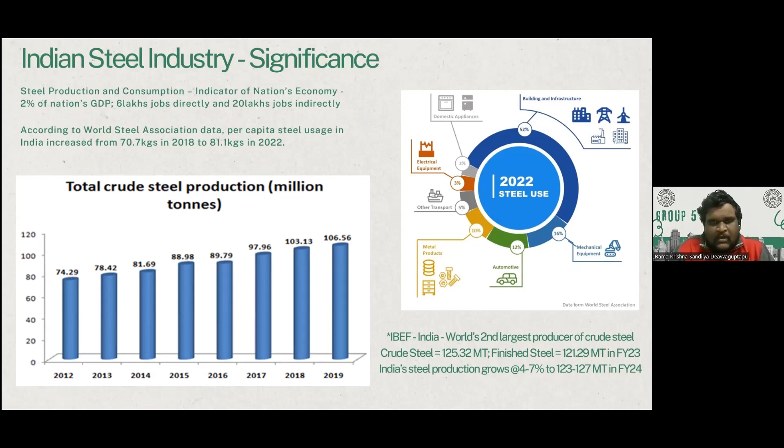For this, the Government of India announced the steel scrap recycling policy, which aims to reduce imports and process recycled steel in an organized and environmentally friendly manner. Over the course of the next 10 minutes, we'll be going through the ESG practices that companies across the world are practicing.

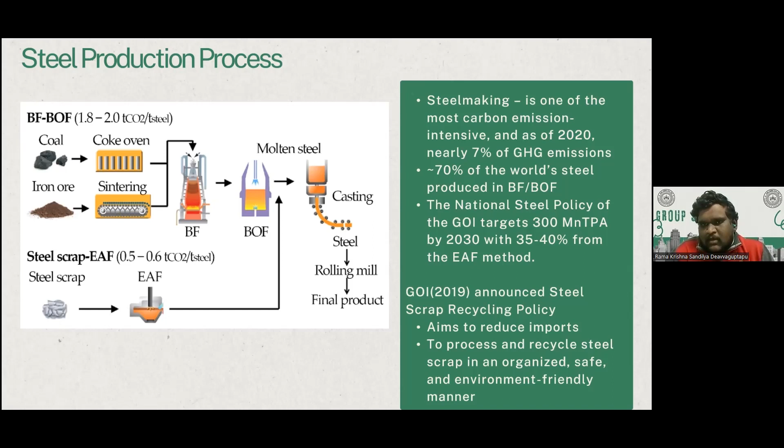The first one to begin with, in the carbon neutrality part, is green hydrogen, which will be formed through the electrolysis of water. By injecting this, there will be almost carbon neutrality in steel. Though there are some limitations at present for this process, over a period of time the rates of hydrogen will be decreasing, which can be seen through the graph.

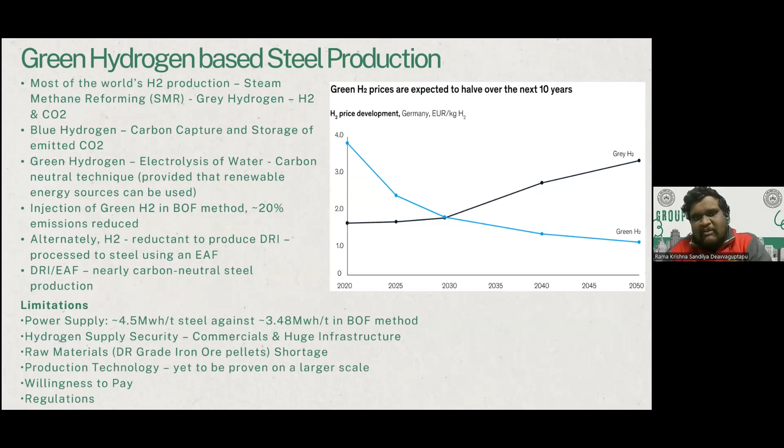Let's move on to the circular economy, a revolutionary concept where we share, lease, reuse, repair, refurbish, and recycle materials and products, minimizing waste and maximizing sustainability. Let's focus on steel, a material that plays a crucial role in our daily life. Despite having low greenhouse gas emissions, the steel industry is exploring ways to reduce its environmental impact. Why? Because steel is essential to the circular economy - it's a permanent material that can be recycled repeatedly without losing its properties.

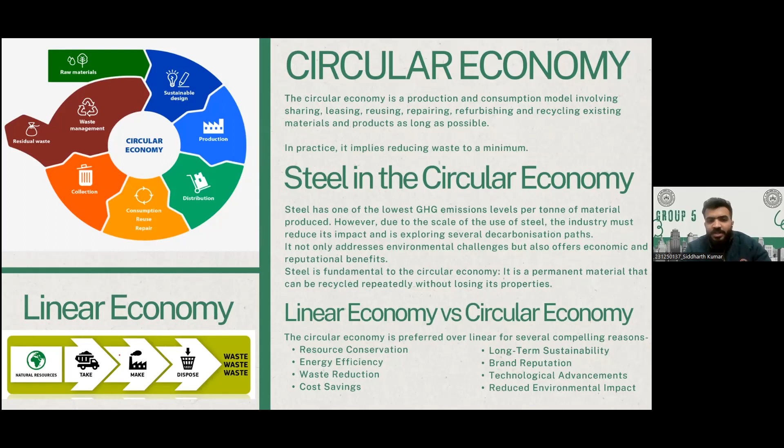So what's the deal with the circular economy versus the traditional one? The circular approach offers fantastic benefits like resource conservation, energy efficiency, waste reduction, cost savings, long-term sustainability, positive brand reputation, etc. It's a win-win for our planet.

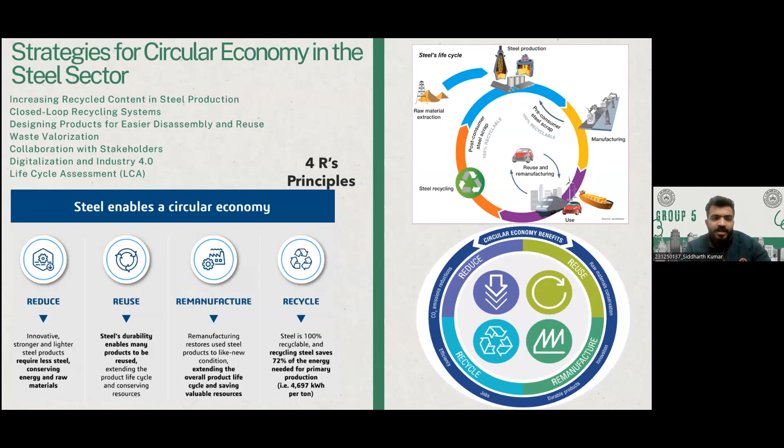So how do we implement circular economy principles in the steel sector? First, by increasing recycled content in steel production, then embracing closed loop recycling systems and designing products that are easy to disassemble and reuse. Waste valorization, collaboration with stakeholders, digitalization, and life cycle assessment are also key strategies.

Now let's talk about the advantages. We are looking at resource conservation, energy efficiency, waste reduction, cost savings, longer product lifespan, innovation opportunities, environmental stewardship, regulatory compliance, etc. It's not just about being green, it's about being smart.

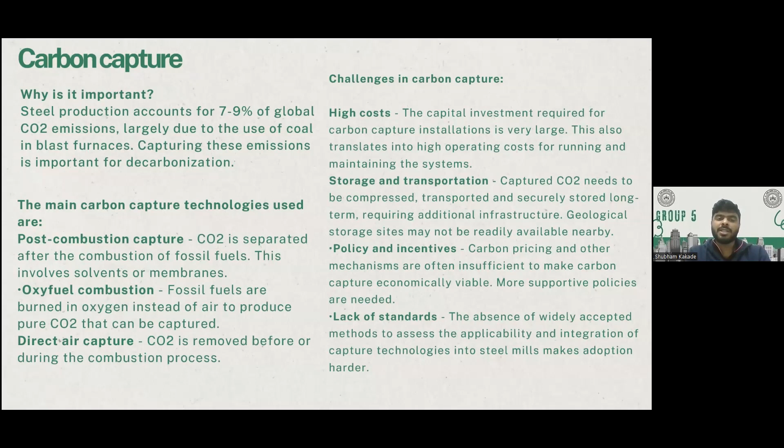Despite all this, there are several initiatives being taken by the entire industry, such as Responsible Steel, which is a not-for-profit certification program that audits steel companies on environmental and social governance standards. Also, the World Steel Association has an initiative where it collects the CO2 emissions of all the companies and sets benchmarks for them.

The UK Steel Charter is a commitment by the UK steel producers on objectives like carbon reductions and clean air. And also UL Ecologo, which is a certification for steel manufacturing plants that are meeting sustainability standards.

Despite these industry steps, some companies are taking steps by themselves, such as ArcelorMittal, which is a leader in this regard. They have promised to reduce emission intensity by 25% by 2030 and go carbon neutral by 2050. Similarly, Tata Steel, Nucor, and POSCO have also made similar promises of reaching carbon neutrality by 2050.

So, Shambhavi will be taking you through the next parts.

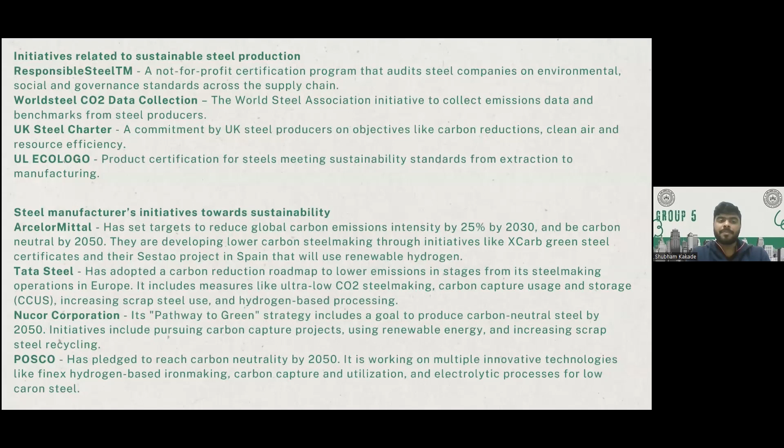I'll be talking about the role of government in steel sustainability and its progress towards sustainability targets.

The steel industry in India operates within the regulatory framework of the Environment Protection Act, navigating through environmental clearances and stringent norms for air, water, and noise pollution given by CPCB, the Central Pollution Control Board.

To enhance its environmental and energy performance, the industry is actively focusing on reducing energy consumption, surpassing current global benchmarks, and maximizing the use of byproducts and waste from steel production into the construction industry and road making.

The pivotal role is played by government and industry initiatives such as the Charter on Corporate Responsibility for Environment Protection, the National Action Plan on Climate Change, launched by government in 2008, and its flagship scheme, the Perform Achieve Trade Scheme. The PAT scheme has covered almost 163 steel plants in India.

Various projects, especially in the SME steel sector, promote energy efficiency and the utilization of slag and other waste. The nationally determined contributions outline ambitious goals for emission reduction.

Significant achievements have been made from 2005 to 2020, including reductions in energy use, emission intensity, adoption of cleaner technologies in integrated steel plants, and successful meeting of 2020 emission intensity reduction targets. The industry is on a promising trajectory to achieve its 2030 goals.

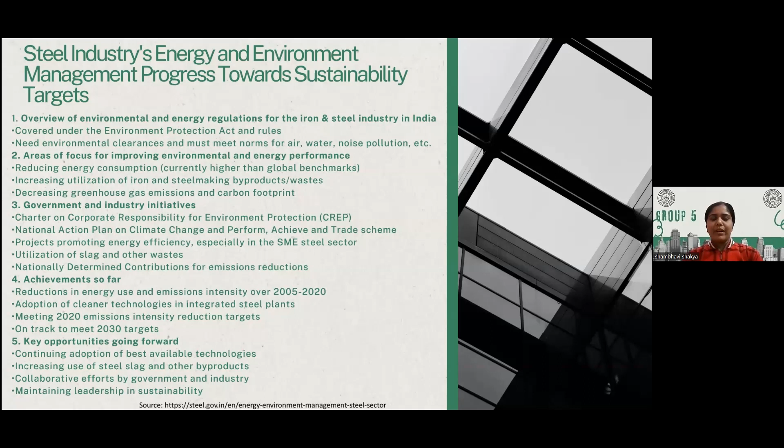The key opportunity lies in the continuous adoption of best available technologies, increased utilization of steel slag and other byproducts in construction and road industry, and collaborative efforts between government and industry.

These are the emission norms for the steel industry given by the Central Pollution Control Board.

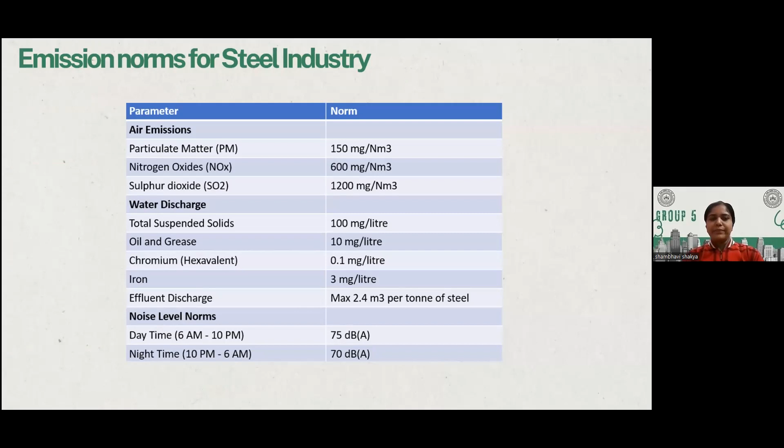Talking about voluntary compliances, in addressing the urgent challenge of rising emissions and regulatory gaps in countries like India, voluntary compliance emerged as a powerful tool for environmental sustainability. Going beyond mandated requirements, voluntary initiatives offer flexibility that drives innovation within firms, fostering a commitment to reduce emissions.

The case study in India's steel sector highlights that approximately 33% of firms, through ISO 14001 certification, achieved a 17 to 39% reduction in emissions intensity.

This voluntary commitment not only signals environmental responsibility, but also brings cost benefit, motivating operational improvements. The study reinforces voluntary compliance as a policy tool, especially for emission-intensive sectors, underlining the need for incentive and increased awareness to promote low carbon growth.

Now, I would like my friends to continue.

As steel goes from mine to market, there are various environmental and social risks. Coming to environmental risk, there are risks of deforestation, habitat destruction, air and water pollution, greenhouse gas emissions, resource depletion, and energy intensities.

The impact of these includes large loss of biodiversity, adverse effect on air quality, significant contribution to global warming, and long-term environmental degradation with high carbon footprint.

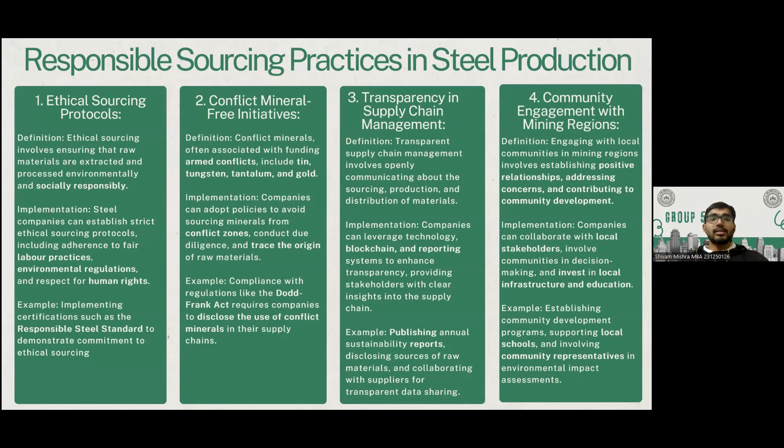Transparency, supply chain management, and community engagement with the mining region should be there. The company should help the local community invest in infrastructure, schooling, and all reports should be published annually. Further responsible sourcing practices are sustainable mining practices, certification programs, and fair trade.

This basically says that the company should stick with minimizing water and energy consumption and promote biodiversity, and they should get certificates like ISO 14001 for environment management and stick with fair trade practices.

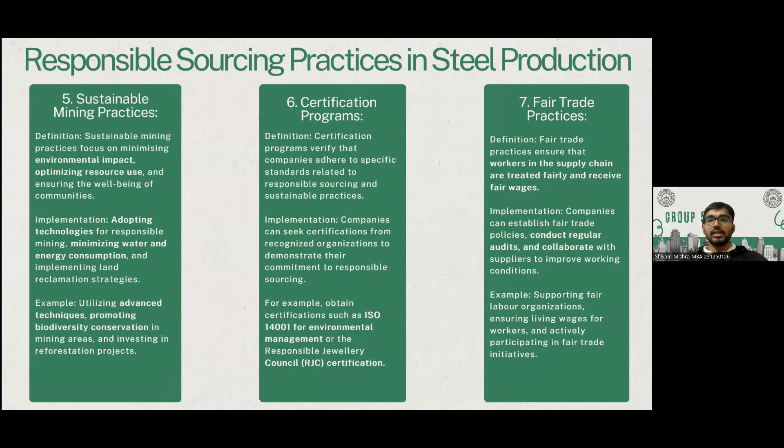Basically it's not just merely a choice. A company should safeguard the environment, uplift the community, and move towards true sustainability. It should be in their DNA, where they set new standards for the upcoming future.

Coming to the stakeholder management part, it consists of four pillars: employees, customers, communities, and the government. For the first pillar, employees, the key issues are scope of learning growth, remuneration and benefits, health and safety. The engagement platforms would be employee surveys, town hall meetings, training programs, and appraisal meetings as well.

For the second part, consumers, consistent quality of products and services is required. Pricing options should be there, and just-in-time inventory should be available. The engagement platform should be industry-leading CRM tools, continuous feedback, and biennial customer satisfaction surveys as well.

Coming to the main part, that is communities, which needs improving the life of people in surrounding villages, water conservation, local employment, and local sourcing as well. The engagement platforms would be CSR initiatives, grievance mechanisms, leadership by commitment, and many more.

Coming to the last pillar, the government, the key issues are compliance with regulation, support of local government in community employment, and skill development. The engagement platform would be advocacy through trade and industry bodies and close engagement with regulators.

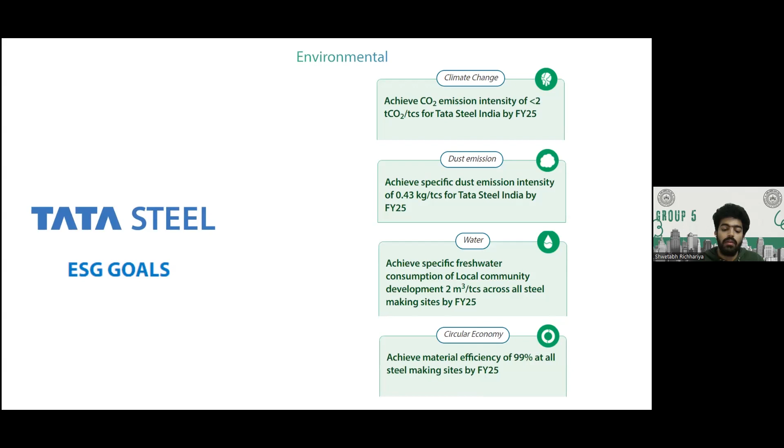Moving on to the social sector, they want to achieve safety, that is achieve zero harm by 2030, as well as achieve 25% diversity in workforce by 2025.

Till now we have seen various challenges in the production of sustainable steel. Let us look at some more challenges, mainly high energy consumption. We know that the production of steel is very resource intensive.

Carbon emissions, raw material dependency - as of now we are depending upon coal and iron ore to a greater extent compared to other alternatives - waste generation, water usage, supply chain complexity, and technological barriers.

Apart from these challenges, we also don't have a framework in place to account and regulate the scope 1, scope 2, and scope 3 emissions, which is quite challenging.

If you look at the opportunities in sustainable steel production, we have recycling and circular economy, which we have already discussed, technological innovations - there is a lot of scope in this particular aspect - and alternative materials, such as hydrogen replacing carbon as a material.

Renewable energy integration - till now we are using coal and coke, but there are alternatives like using an electric arc furnace, with electricity generated by renewable energy sources like wind energy, solar energy, and other forms. With this, we can cut down carbon emissions.

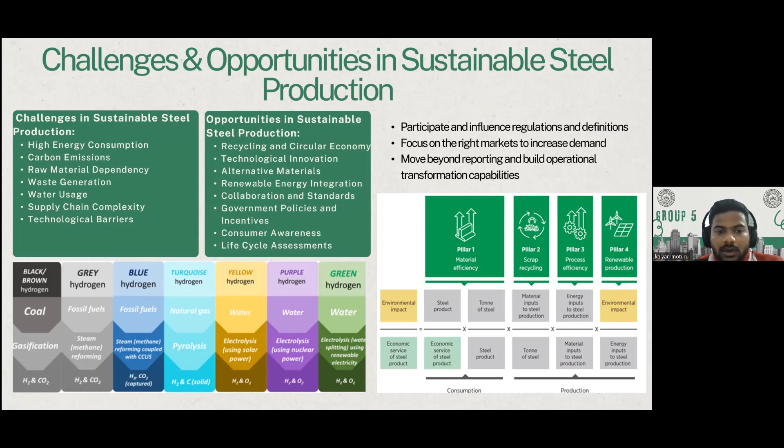And consumer awareness - till now we are only looking at the cost perspective, but if you move on to how sustainable steel can help both the seller and the buyer, it will help a lot. Coming to the main role of the G20 summit.

The term sustainability has been coined in one of the summits. The G20 summit has a major role for the Indian steel industry, because G20 has suggested that we can contribute and collaborate with major steel producing countries like Japan, China, and other major countries.

It emphasizes that there should be dialogue and cooperation between G20 countries, which will not only help us collaborate in producing sustainable steel, but also help us understand better practices in other industries and countries, and exchange best practices among national policymakers and regulators.